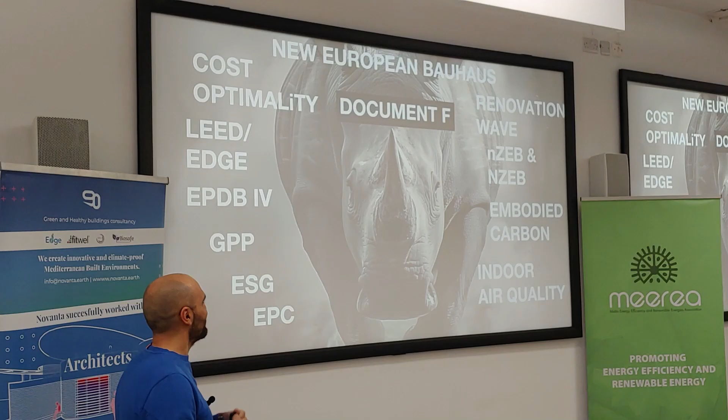So nowadays we have several buzzwords going around the web and even when talking to experts. One is cost optimality, Charles is an expert on it. Renovation wave, the recent published document by the government. LEED/EDGE, all this certification. nZEB with the small letter and the capital letter. EPDB4, embodied carbon, green public procurement, GPP, indoor air quality, ESG. So we have EPC and also, last but not least, the document F.

In reality, what I'm trying to do today is to simplify the process and trying to make it understandable for most of you. I will be a bit technical, but also trying to avoid unnecessary complexity. I don't want to be too simplistic, but I want to, let's say, engage with an elegant simplicity. So it will explain you better what it really needs to be focused on.

So today the topic of the lecture is the opaque envelope, because document F is very complex and has different chapters in which there are specific requirements. Today I want to give you an overview only on the opaque envelope and also connect with the ancillary concepts that can be included in a design that wants to exceed the expectation of a code-compliant building.

So just briefly about me, I've been working in Malta for more than 6 years, covering different fields from being a specialist in environmental design to a perito architect, and then as a research officer with Professor Buhagiar.

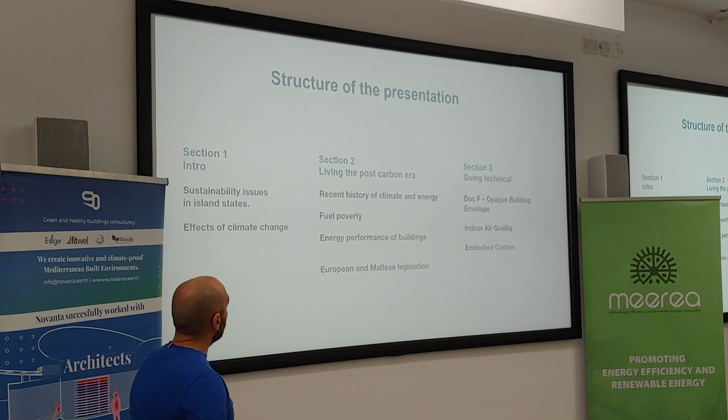Now, the structure of the presentation wants to be, so have a little introduction to give you an overview of what's happening behind the scene and also what is the concept, the context we are operating nowadays, and then we go a bit technical. So let's start with the context of sustainability in island states.

Essentially, it's known that to survive and to keep on having our wealth and well-being, maintain our wealth and well-being in islands, we have to make sure that we have enough energy, affordable energy, we manage our waste correctly, and we have enough clean water.

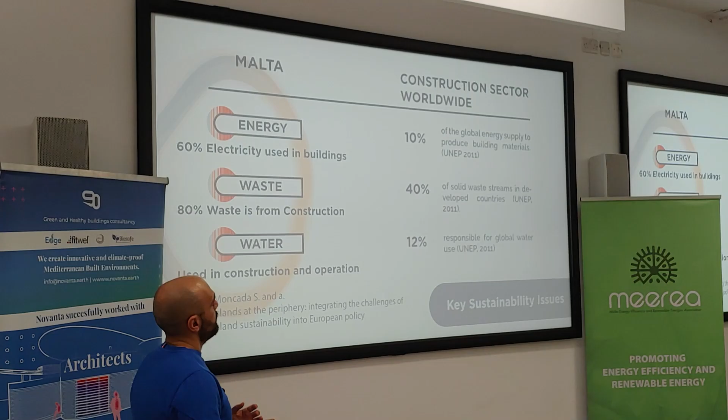But at the same time, energy, waste, and water are topics that are concerning construction, and this is worldwide. And so we can see that in the construction sector worldwide, according to research in 2011, 10% of the global energy supply was used to produce building materials. 40% of solid waste stream is associated with construction activities, and the use of water is most of 10%, 12% of use of water, of the global water, is used for construction purposes.

So managing those three factors that are, in a nutshell, the pillars of what we call green building, it's already a sustainability issue in an island, and also interconnected with the construction industry.

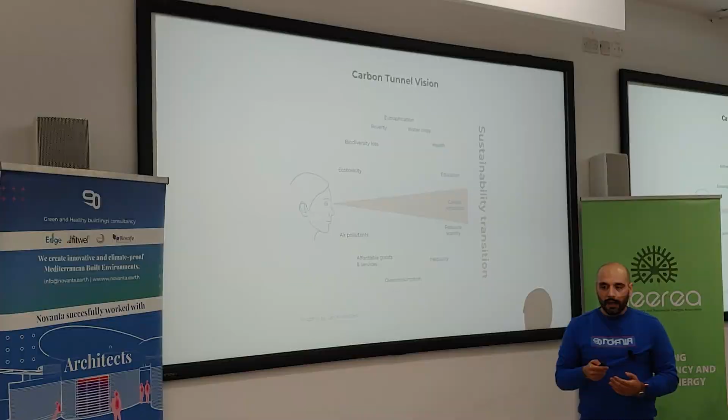At the same time, most of us are always overwhelmed by the topic of carbon storage, carbon capture, carbon footprint. But there is a problem regarding sustainability if we leave the discussion only open to the topic of carbon emission. It's called the carbon tunnel vision. Sustainability, it's much wider as a concept, and then we have more aspects to cover. And if we keep on focusing only on emissions, it's just one part of the story.

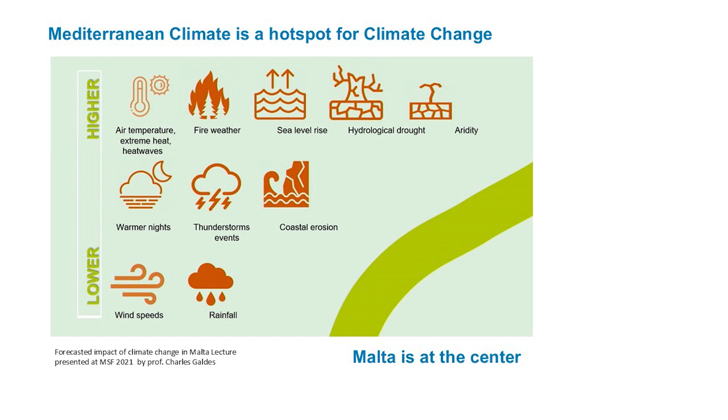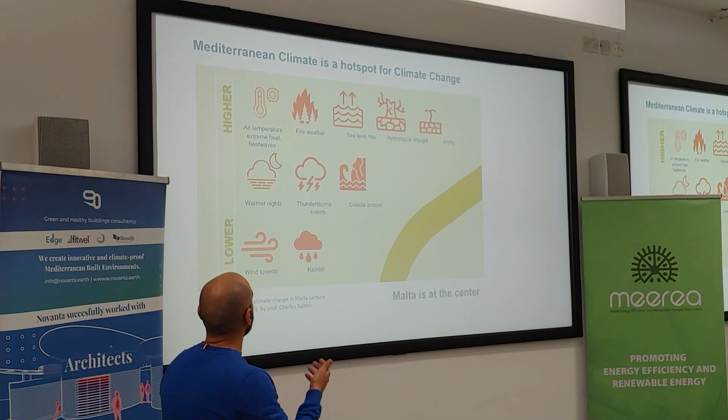We know, thanks to the evidence provided by Professor Charles Galdies, that Malta is facing the worst effects of climate change because it's at the center of the Mediterranean Sea. And the Mediterranean Sea is a hotspot for climate change. What we are experiencing now, and the projection up to 2050, is that those events, meteorological events, can worsen.

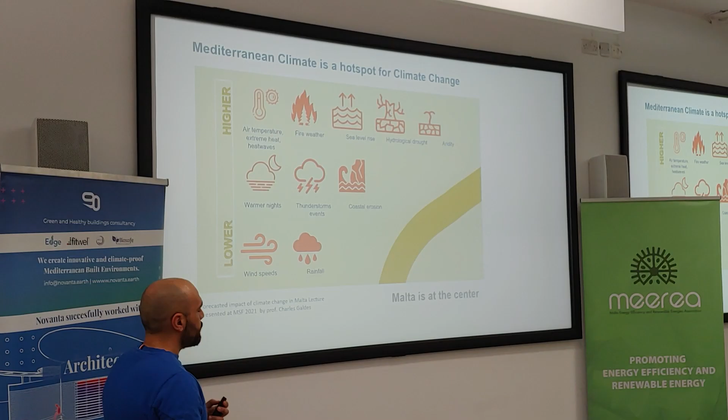So we have increased air temperature, fire weather, sea level rise. So there is a collection of potential events that are hitting the Mediterranean, and Malta is at the center. And what is surprising is also that there are higher probability of increasing air temperature, but at the same time, there is lowering also of wind speed and rainfall. So it's a problem of having in an island, knowing if we have low rainfall, where are we getting the water, potable water, etc. So there are a lot of problems interconnected that climate change is kickstarting.

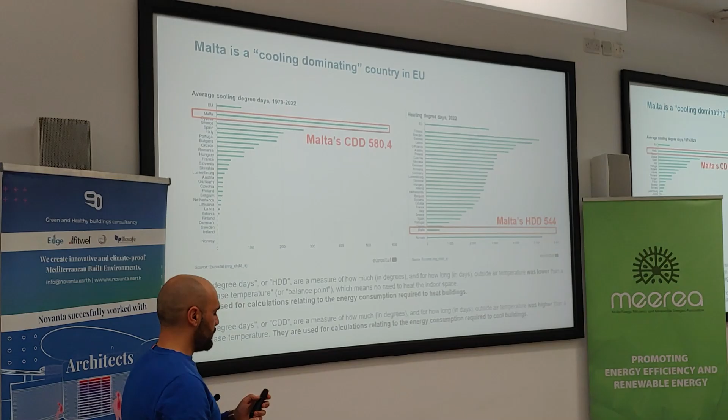Malta is a cooling dominating country, which means we can no longer focus only on concepts like U-value, simply because yes, we have to cater for winter behavior of the building through the legislation and document F. But in reality, we should also consider dynamic effects that are more pertinent to a cooling dominating country.

As we can see, Malta is the hottest country in Europe, having the highest number of cooling degree days, and specularly as opposed to the heating degree days. So the demand of heating load is definitely lower.

Now we are living in the post-carbon era. And what does it mean? I was born in the 90s, and after doing this job for several years, I realized that the topic of sustainability in building construction is well established, more than 30 years.

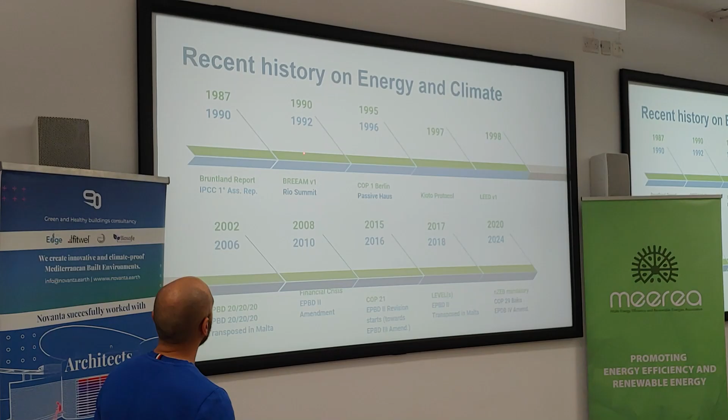In 1990, we have the first IPCC assessment, but then also the first edition of the BREEAM green rating scheme. Then we moved later, in 1996 we have passive house, and in 1998, thanks to the knowledge developed in England, the development of the first edition of LEED.

So thanks to the accumulation of this knowledge, it comes without surprise that the European Union decided to take the lead on those topics, at least on energy performance, and launched the first EPBD, the 20/20/20 package.

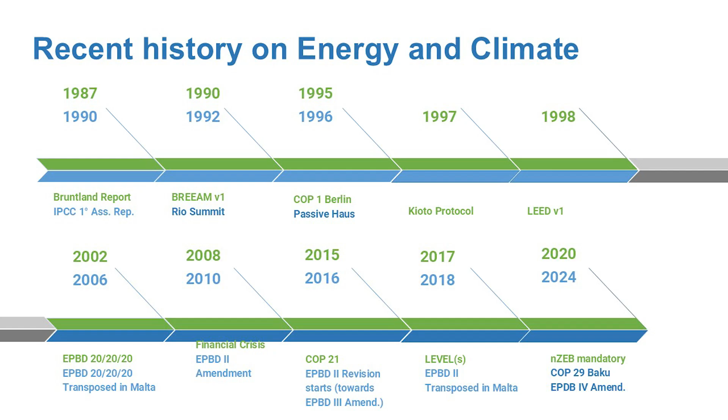Then it's been a landslide because we have the second amendment in 2010, the famous COP21, which established the legally binding agreement, and now the United States has decided to withdraw according to the new government and new presidency.

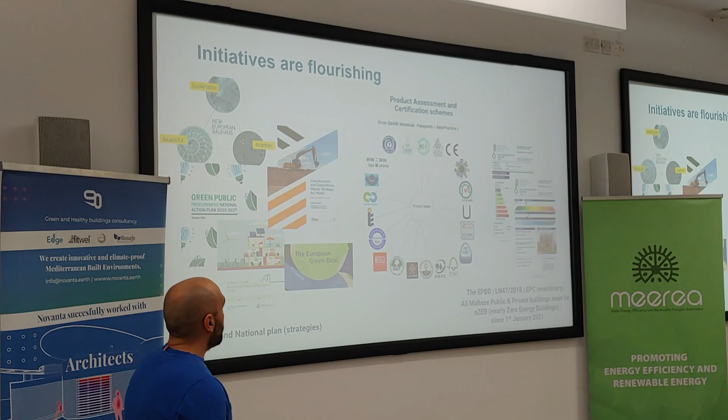But we are continuing working on this, and you cannot really stop this wave of sustainability because we have several commitments in Europe to respect. And one of them is the fourth amendment of the Energy Performance of Building Directive.

That's why initiatives are flourishing. And it's not only European and national plans, but also commercial entities that are trying to cover the loopholes of the sustainability world by issuing new product labels to engage with the topic of transparency. The more transparent we are, the better it is for the market.

And also we have legal requirements such as the famous EPC. But we must always remember ourselves, why are we doing this?

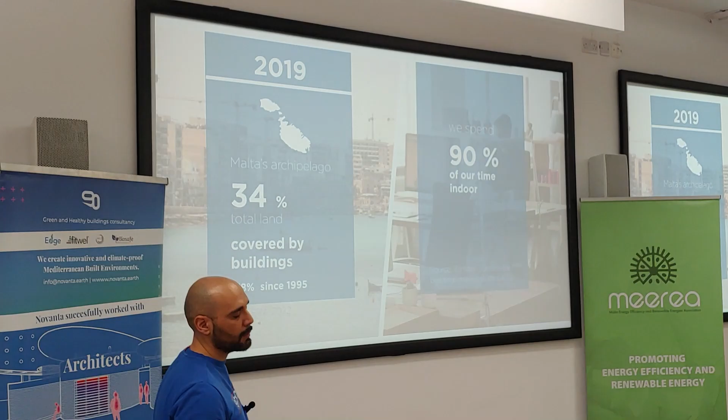Locally, this can be boiled down to two main topics: the fact that 1/3 of the area of those islands of the archipelago of Malta are covered by buildings, and also because we spend most of our time indoors. These are two topics that give much food for thought to continue working on, because buildings are very important for us.

It's also important to remind that thanks to the involvement of the European Union and those directives, we have made an advance towards focusing also on existing buildings. It's not only about designing better newly built buildings, but there is a mandate to focus most on existing buildings, because if we take the life cycle thinking approach, we can imagine there are far less emissions associated with the whole construction process and use phase when you just retrofit a building or adapt it to new use.

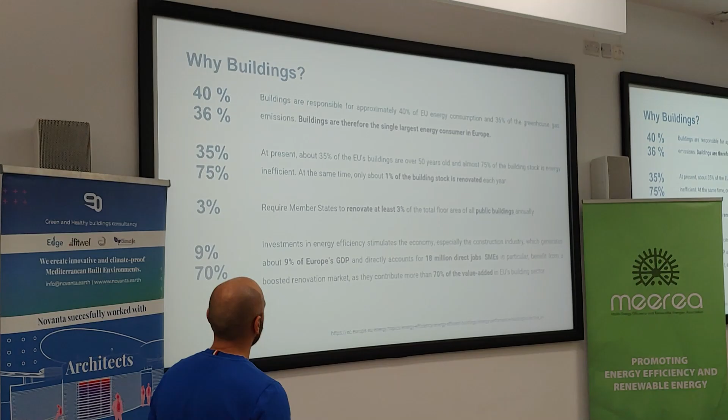This has liberated several new opportunities for creating new jobs, and also to have public buildings leading by example.

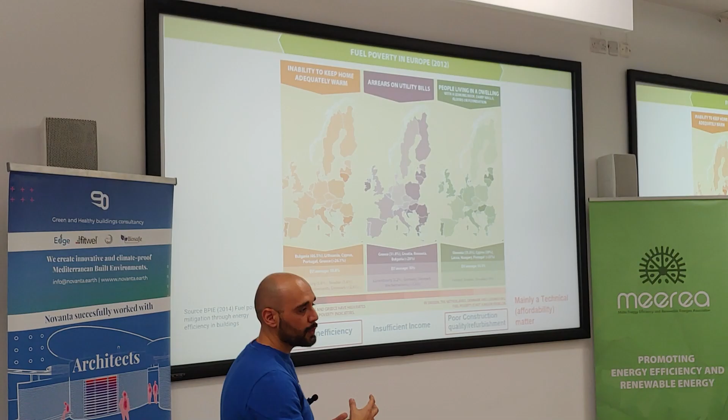If someone of you remembers the little video I launched on social media when promoting this event, I used a particular reference regarding the fact that more than 30% of the buildings in Malta are not built, designed, and constructed to prioritize health and well-being. We can associate this to this graph and this figure in particular.

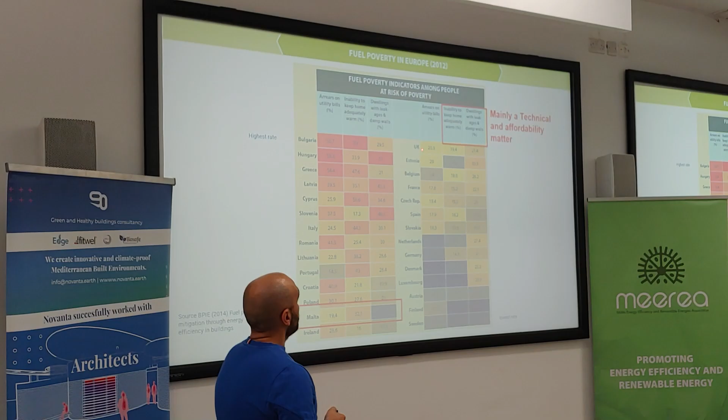What I would like to emphasize is this topic of energy poverty, or in other words, based on three factors: arrears on utility bills, inability to keep home adequately warm, and dwellings with leakages and damp walls. If we look at those three pillars, we are basically dealing with a technical and affordability topic.

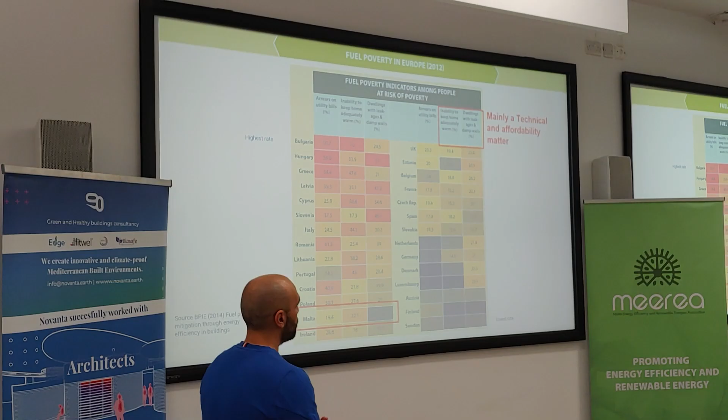It's not something that requires rocket science, something we are not able to do. So it's important to remind even our government that if we push more on these topics, it's definitely feasible with today's knowledge.

There is another evidence from the long-term renovation strategy, again substantiating the fact that it's a technical and affordability matter. From the data of EPC in Malta, it was discovered that the average U-value of the walls is 1.88, and nowadays we have a restriction on U-value at 1.22. Again, these are average figures derived from the various types of assessed building typologies.

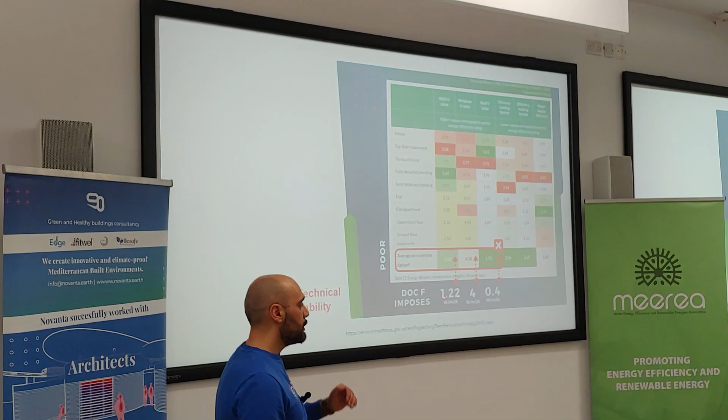Windows are unfortunately still quite high, even though not so far from the limits of document F. And what surprised me is the inefficiency also of the roof, notwithstanding a very low threshold for U-value even in the previous version of document F.

Okay, I will briefly go through the topic of energy performance of buildings and how it is essentially organized on a technical level. I don't want to overdo it, most of you already know this, but it's good to remind ourselves.

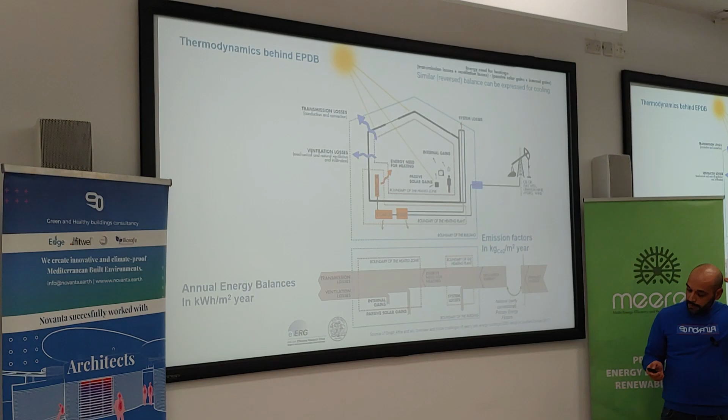So we have an open thermodynamic system, and we have different boundaries pertaining, one to the building envelope, another to the heating plant or system in general, and then we have to provide energy. So this is the direction. We have the very first source of energy, the primary energy that comes from the power plant. Then this is distributed through the grid, and we have a first inefficiency when we pass from the creation of the energy at the power plant through the grid. So we have the loss.

And that's why we associate emission factors. Then this amount of delivered energy gets served throughout those boundaries. And essentially, throughout the process, the flow chart, we see that we end up having several losses. And in the case of heating loads, there is this relation that is similar also to the cooling side of the story: transmission losses plus ventilation losses minus passive solar gain plus internal gains.

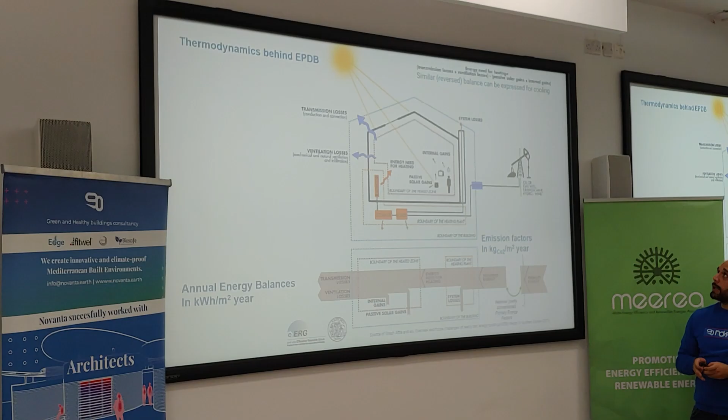In summer, the problem of internal gains becomes a load, so we need to remove it, and we switch the two factors of the equation.

So we can also assign a direction of efficiency towards low carbon buildings. And we can see that if we improve the performance of the boundary of the heated zone, that is the first action you can take to improve your energy efficiency. So the thickness of this arrow must be reduced, okay?

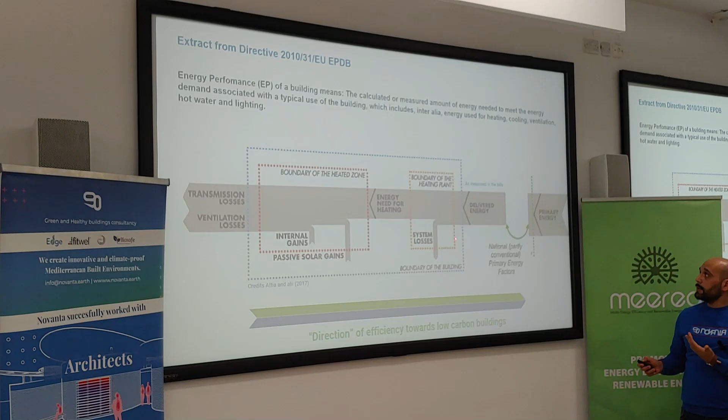And it can also be helped by the internal gains. As a cascade effect, you will then need less delivered energy to keep the same equivalent level of indoor comfort. And then also the energy demand and the energy needs will definitely be lower. So we will be having less carbon emissions, in a nutshell.

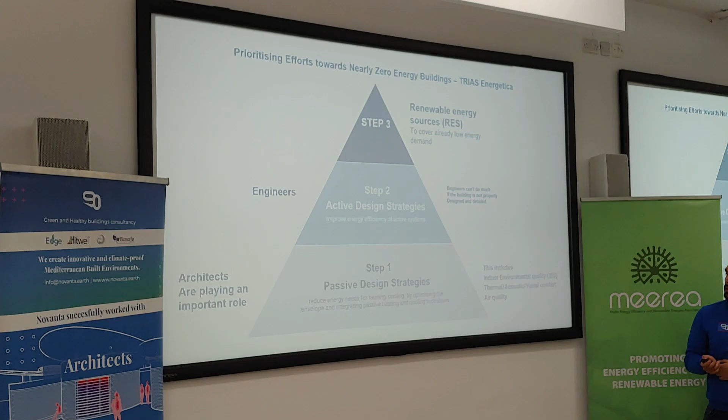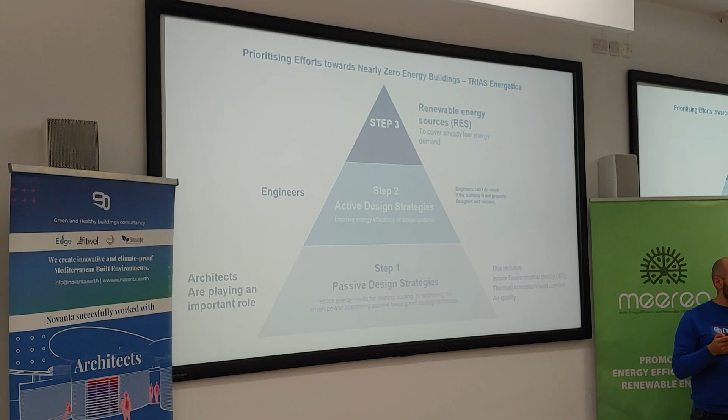So engineers will help us in providing and sizing only what is needed to provide the level of comfort. And then we won't need big, for example, photovoltaic fields to have a net zero building in Malta. We will just cover the net demand that is necessary to cover.

Passive and active systems - what is passive? Passive strategies work on building materials specification, so thermal conductivity, specific capacity, etc., dimension and orientation, window to wall ratio, shading devices, insulation, and glazed area, of course.

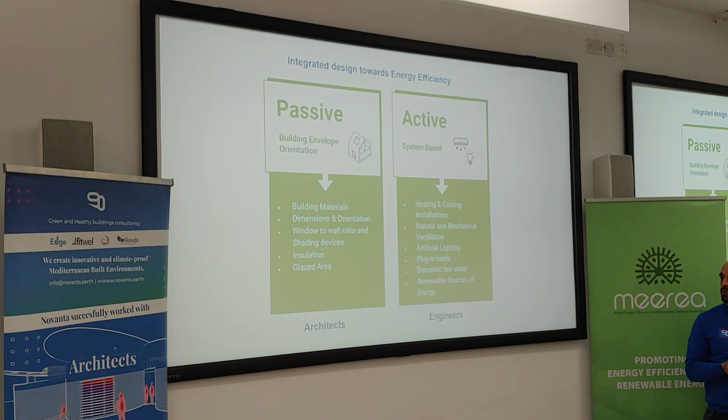And then active, system-based: heating and cooling, plug-in loads, renewable energy sources. So these are the two main disciplines in architecture and construction that are getting together to support energy efficiency and sustainability in general.

I will briefly remind you of the legal requirements, because as I was saying, in 2002 we had the first EPBD at European level. And now, after 22 years, we have the Fourth Amendment. So we are encouraged by the European Union to continue working on this. Also, the Second Amendment introduced the concept of nearly zero energy building, NZEB. And the Third Amendment was raising attention on major renovation.

These are the topics that the directive, the Third Amendment, was insisting upon: essentially the smart readiness, the cost optimality, and the existing building, and also knowing what is a major renovation, what are the conditions to define it, and also imposing stricter requirements.

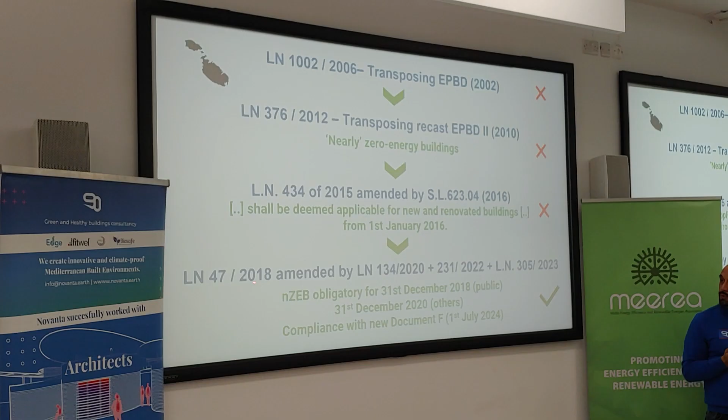In Malta, Malta joined the European Union in 2004, so it was still lagging behind at the time. Now it's trying to get back on track. So we see that in 2018 there was a rush to implement the EPBD2. To be honest, I don't know now what are the plans for the Third and Fourth Amendment, but Document F, the new version of Document F, is aligned to the second EPBD.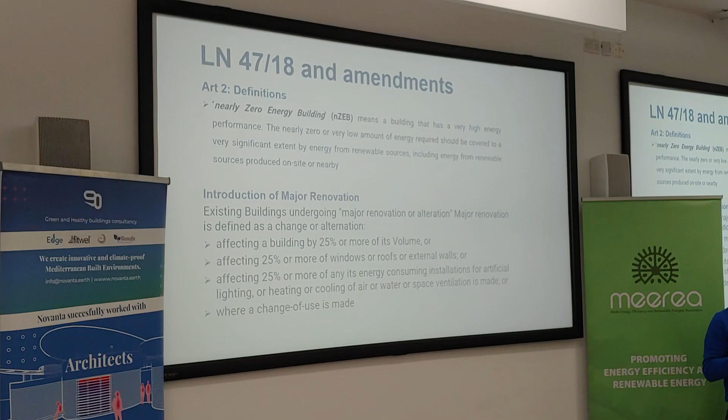The zero energy building is a building with an extremely low amount of energy needed to cover the needs, and the demand of energy should be also provided most of the time by renewable sources that are on site or nearby. Also, major renovation is a very interesting topic, because once we get an existing building, you might have to perform even little intervention.

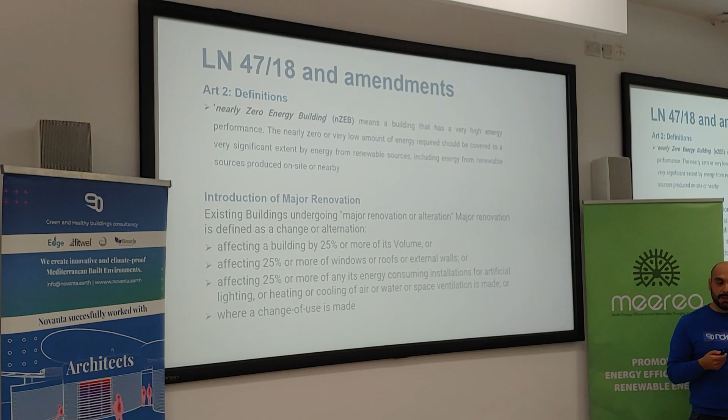Then it doesn't make sense to charge you with requirements that might become very expensive. But when your development is more extensive, maybe you want to have a deep renovation of it, then the limits from the law are 25%, either 25% of the volume of the building that is changing.

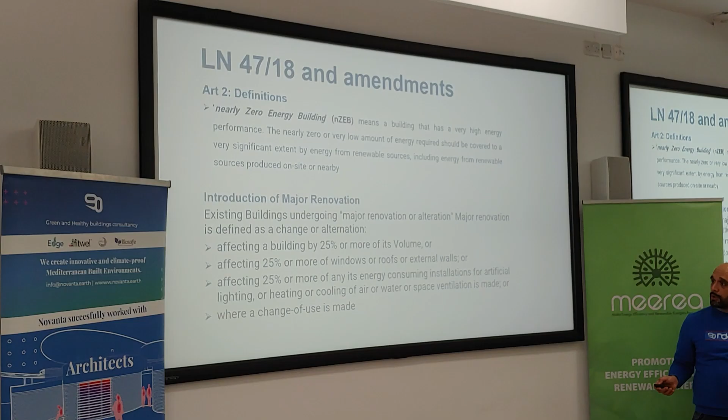The works are affecting 25 or more, 25% or more of windows or roof, so the building envelope. This is another factor to demonstrate major renovation: that you are changing more than 25% of energy consuming installation, or simply a change of use.

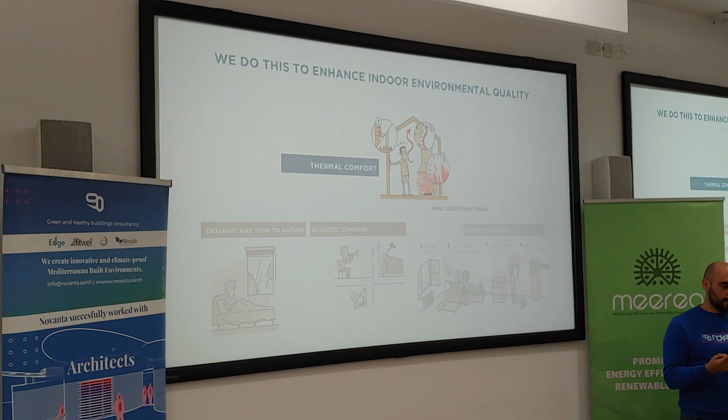And we have this urgency to comply with standards. But in my opinion, sometimes it's always good to remind why we are doing this. We are eventually doing this because we want to enhance our thermal comfort, because heating and cooling is mostly related to thermal comfort. But we can also overlap to the other topic of environmental quality, indoor environmental quality.

So let's go into the detail of the structure of document F. Do you have questions so far? It's fine for you? Shall we continue? Okay.

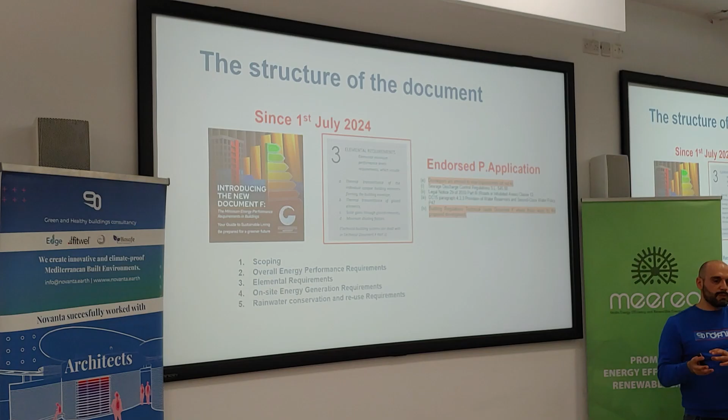Most of the parents in this room will know that once you get a permit endorsed, you will have to abide by the building regulation, and even before, but mostly now from the 1st of July 2024, we have to abide by the technical document, which has a new version. There are 3 documents: one specifically focusing on residential building, another on non-residential building, and the third on technical service. It's a quite interesting structure because you have to address different problems, and it gives you an overview of the system.

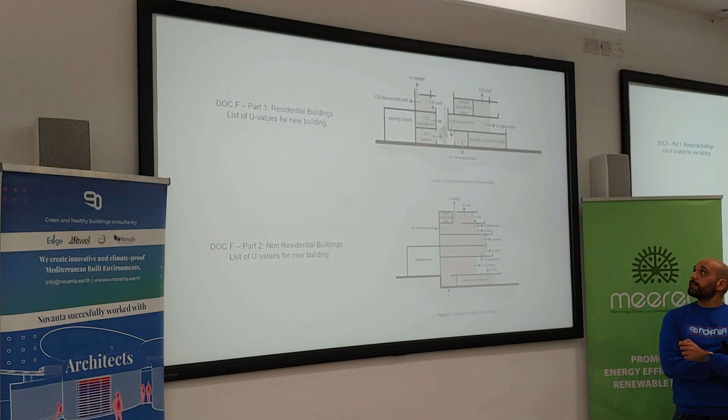It gives you an idea what you can install as an energy-saving technical system. Since today we are talking about the opaque envelope, I want to emphasize in a nutshell what are the requirements for the envelope. We have in residential building, this figure here, we have in this case for major renovation, a limit on U value of 0.59, and similarly for exposed floor we have 1.57.

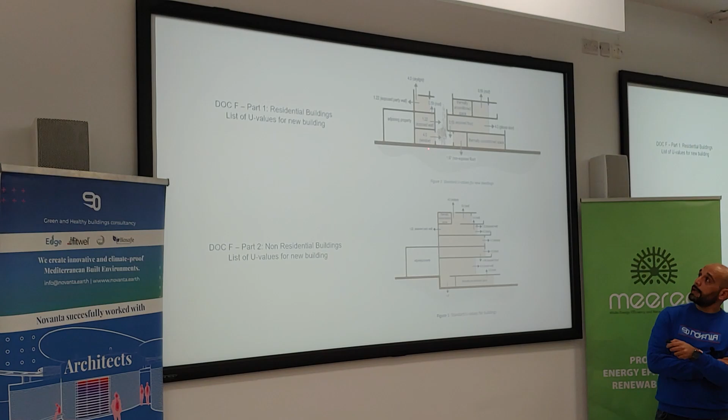So the exposed wall - this is not... sorry, new buildings: 1.57 for major renovation, as opposed to 1.22 for new buildings. And then also you have non-exposed floor.

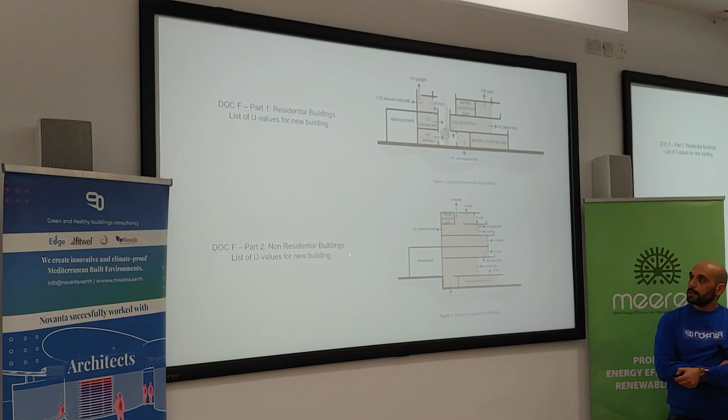Then there is also a requirement on windows, but it's quite easy to demonstrate that you are complying with this. Tell me, observation? There's a mismatch between the roof figures - the upper drawing says 0.59, and then there it says 0.4. The lower one is for non-residential. The government is saying that probably it's much more important to protect the roof, to have... it's a mistake in the drawing.

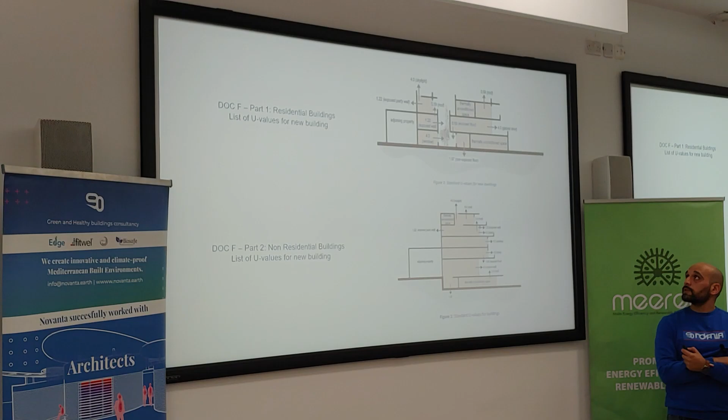But it's legal, so anyway. But they have put a small note - a really small note that says it should be 0.4. But even for residential, you mean? Ah, okay. Anyway, consider that to get to 0.59 or 0.4, you need at least 10 centimeters of insulation. You cannot do it with less.

The topic of U value revolves around mainly 2 material parameters: one is the thickness, and the second is the thermal conductivity. You calculate it from ISO 6946 - you sum all the thermal resistance, all the resistance of each layer of the envelope, and simply you get the final U value. Then you repeat this for all the walls, roofs, exposed floor, non-exposed floor.

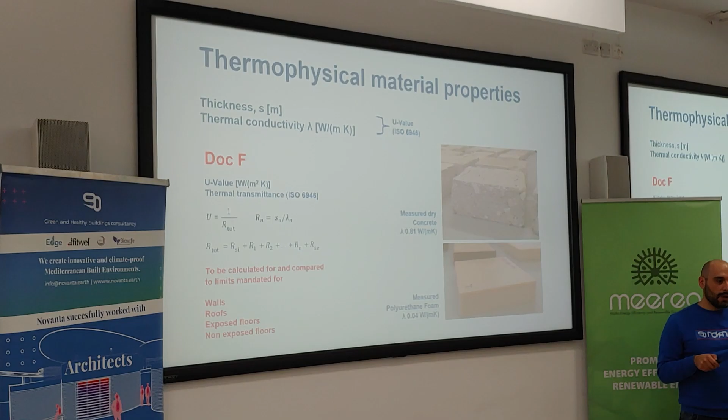To be precise, non-exposed floor has a much more complicated equation because it tends to take into account the interaction between the terrain and the wall, and this is typical for basement or semi-basement. Exposed means exposed to the outdoor environment. Non-exposed is the ground slab, or an unconditioned space like a garage, or stairs. So those spaces that are unheated, where you don't have direct control on the temperature, and also the outdoor environment.

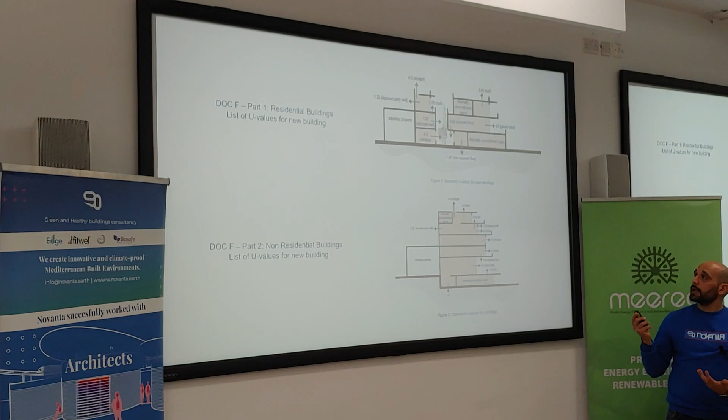So the thermally unconditioned spaces are considered as being outside of the building, like outdoors, in terms of dealing with different stimulus. It's not the same as the outdoor, and essentially it's just a different level of requirement that you have to abide with.

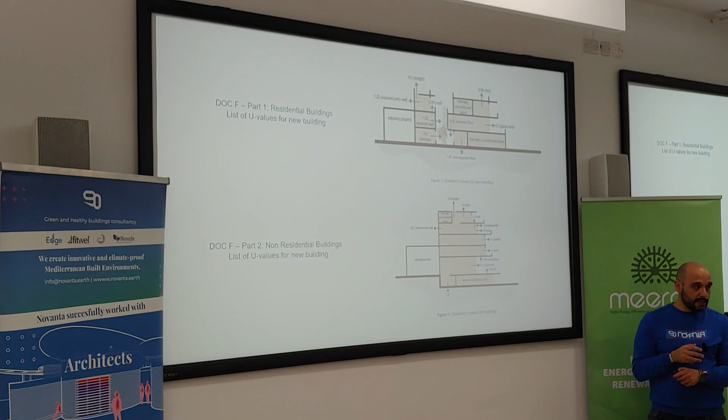Definitely, I think who did this part of the committee was saying maybe the contact with the ground, the outdoor stimulus is not as variable as the outdoor one, because the terrain tends to be seasonally stable at a specific temperature, but then we're not seeing the content of water, and that's another can of worms. In any case, they were saying the variations are mild when in contact with the ground, as opposed to the outdoor environment that is more variable. So you need a stricter requirement for outdoor elements, for elements exposed to the outdoor elements.

Just to give you an idea, a non-insulating material like concrete has 0.8 watt per meter Kelvin thermal conductivity. An insulating material like polyurethane foam has 0.04. So you see the difference in the order of magnitude between the two parameters.

Okay, let's make a step forward. Document F includes a database of material properties that are indicative for you to start your assessment, but they need to be replaced once you decide what material you are really installing in your building.

In that list, it's also included the density and the specific heat capacity. Thanks to these two other material properties, we can tap into ISO 13786, and we can also study the dynamic parameters of building materials.

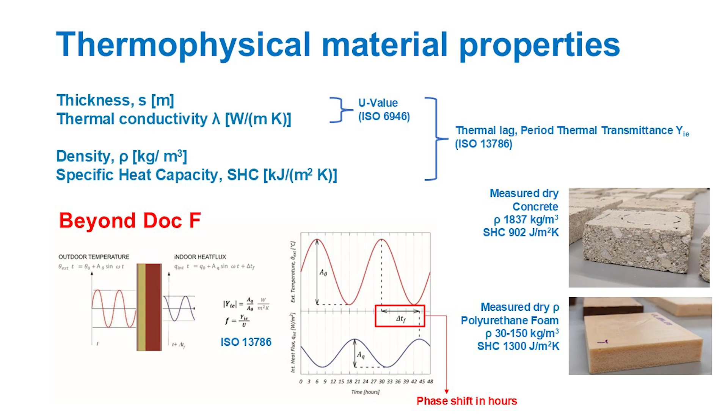So you can even decide, according to how you're going to use the building and the type of building: really, I don't need thermal mass, but I need to heat up and cool down the building faster. I put the insulation indoor, as opposed to the most recommended solution of having the insulation on the outer skin.

Simply, the periodic thermal transmittance is defined by the ratio between the heat flux, the indoor heat flux - this blue curve here - and the outdoor temperature. Those are two sinusoidal relationships, and the phase shift between the peak of the outdoor temperature, the maximum temperature usually experienced at noon or at 2 p.m., needs to be delayed by several hours from the peak of the indoor heat flux released.

And this heat flux then essentially will constitute a load, okay? And the more massive - the higher the thermal mass is - the higher is this time shift between the two sinusoidal curves, okay?

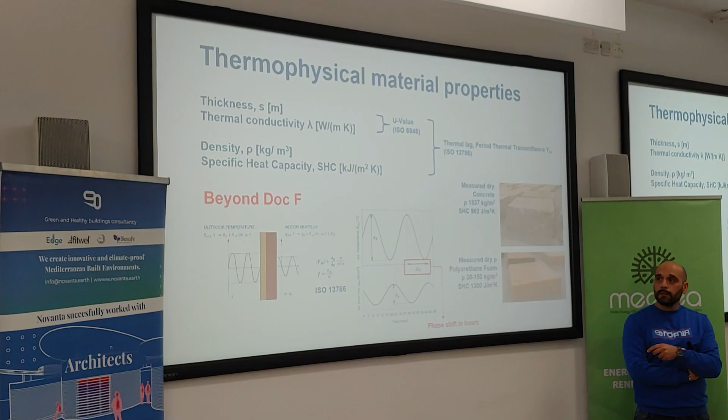And that's it. So it's important to know that this calculation of thermal mass is not just a random number, a very big number like we have in the EPC calculation, the so-called effective thermal mass. There is a much easier metric to calculate, to quantify, at least theoretically, the impact of thermal mass that is expressed in hours. I will show you with examples what it means.

Just to give you an idea in terms of density, keeping on with this comparison between an insulating material and non-insulating material: concrete has a density of 1,837 and a specific heat capacity of 900 joules per meter square Kelvin. As opposed to insulation, which is typically between 30 and circa 100, 150 kilograms per cubic meter, while the specific heat capacity can be quite interesting, up to 1,300.

Now, to show you the importance and the position of the insulation layer, and the way you can really change the behavior of the opaque wall according to your needs, I will keep the U value fixed at 0.56, and vary the other parameters. I will show you how the thermal lag and the internal areal heat capacity will change.

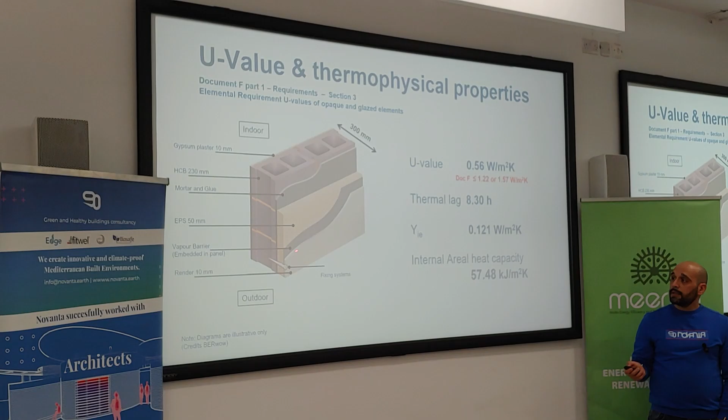So in this case, we have the cappotto, a famous cappotto solution, 300 millimeters. Simply a 230 load-bearing wall with an EPS panel, 50 millimeters, the fixing, and of course, render and plaster indoor.

So, according to ISO 6946 for the U value and ISO 13786 for the dynamic parameters, we have 0.5 for the U value, and then we have a thermal lag of more than 8 hours, a Y value - the periodic thermal transmittance - of 0.12, and an internal areal heat capacity of 57 kilojoules per meter square per Kelvin.

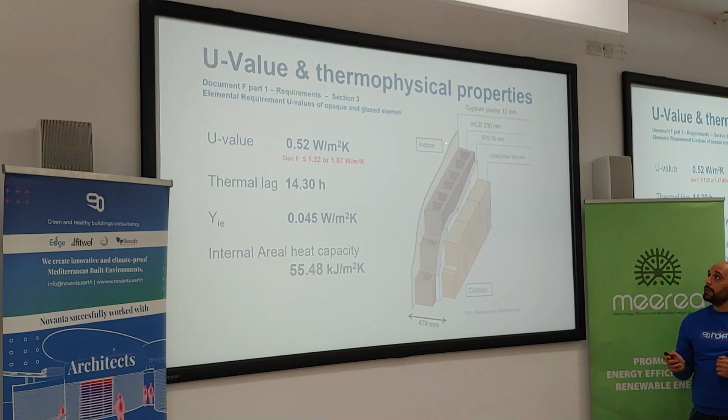If we opt for a double leaf wall, okay, 230 HCB internally, 50 millimeter EPS, and limestone leaf of 180, we have still a U value of 0.5, but the thermal lag is skyrocketing to 14 hours.

And also, this is reflected by the periodic thermal transmittance. But the internal area heat capacity remains the same. Why? Because we are maintaining the same material facing indoor, and because of this property, its density, gives us this kind of value.

Also, it's important to notice the thickness of the wall. To maintain the same level of U value, you are adding 17 centimeters to maintain the same static metric. But here we are privileging the dynamic effect, so we are gaining more than 6 hours of thermal lag.

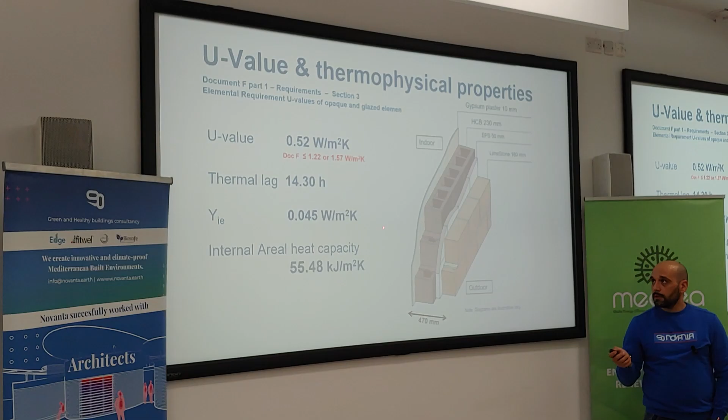The thermal lag, in a nutshell, is the theoretical amount of hours through which you can expect to perceive the outdoor temperature indoor. So this perception is delayed by this amount of hours. Again, theoretically, because the models might be imperfect, but they are quite good, and I have demonstrated it in another paper I'm currently writing.

And again, these are walls with another purpose. So theoretically, you're saying it's 14 hours in this case for the thermal lag to start feeling the effect. Will residents start feeling the perception of a warmer indoor temperature, especially in summer? And cooling off will take even longer?

Yes, it will take longer. Thanks for the question. The thing is, they will feel that temperature, for example 40 degrees, only if 40 degrees are maintained over the day. But most of the time we have temperature swings, so the wall won't have that external stimulus to maintain and transmit that heat proportionally, and then eventually we will be feeling 40 degrees after 14 hours.

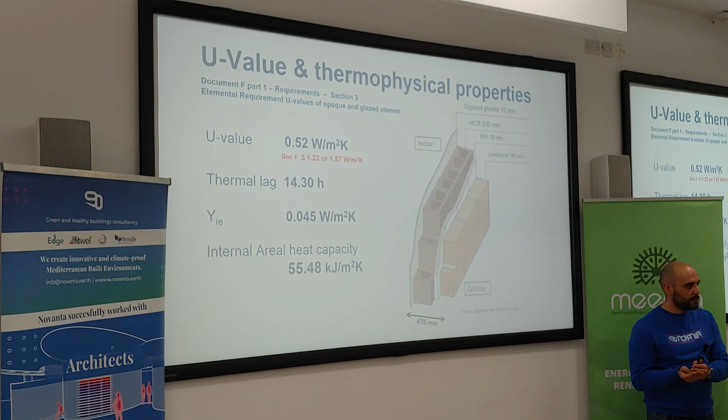But the concept behind the thermal lag, and thermal mass in general, is this: the advantage is that having those temperature swings, definitely we will not reach, surely we will protect ourselves from this kind of events.

Perhaps the thermal lag of 14 hours could be interpreted in a real building, like a terraced house where you have a bedroom upstairs, or top floor. If the sun is strongest at 2 o'clock in the afternoon in July, the hottest day, then 14 hours later you are asleep in that room, like 4 o'clock in the morning. Just consider heat lag - would you actually feel the heat?

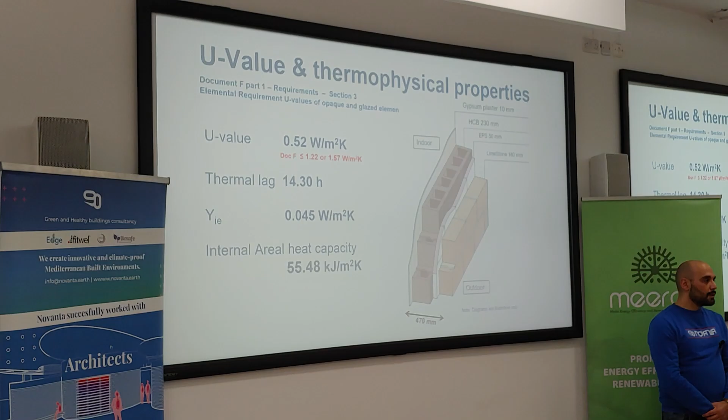Yes, exactly, for a bedroom, but maybe for a living room, or classrooms in a school, it's a different story. So I think it needs to be tweaked for the building type. Exactly, that's the power of having this kind of assessment right from the start when you design your building - you can start this conversation with the designer and understand what needs to be done according to the use of the building.

For example, if we consider the winter season instead, the thermal mass will help you in maintaining the comfort, the heat, for longer. So it works positively in both seasons.

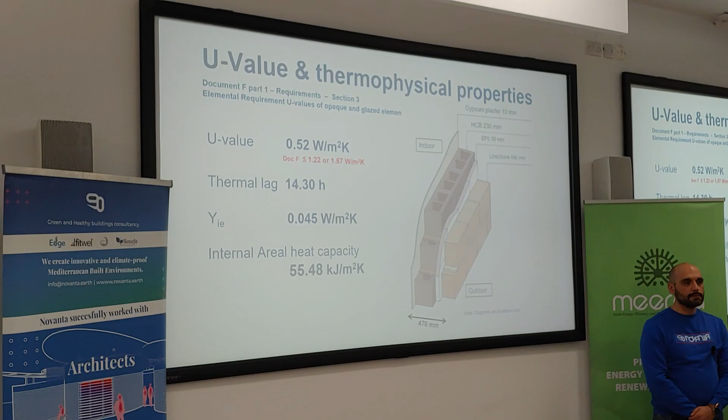And when you say thermal lag, is that considering a constant outdoor temperature for it to calculate? Yes, you are considering the temperatures outside - essentially the curve, the relationship, is always the same.

Then the software that does this for you considers the profile throughout the day. But eventually, thanks to the properties, if outside the temperature is below the indoor temperature, then you would have a reverse direction. Yes, and definitely, but it's not the direction of the heat that matters - what also matters is how the wall reacts to those external stimuli.

And so this is a theoretical calculation to give you - listen, if you want to opt - it's important to focus on overheating. Yes, and again I'm insisting on this because this is beyond Document F, of course.

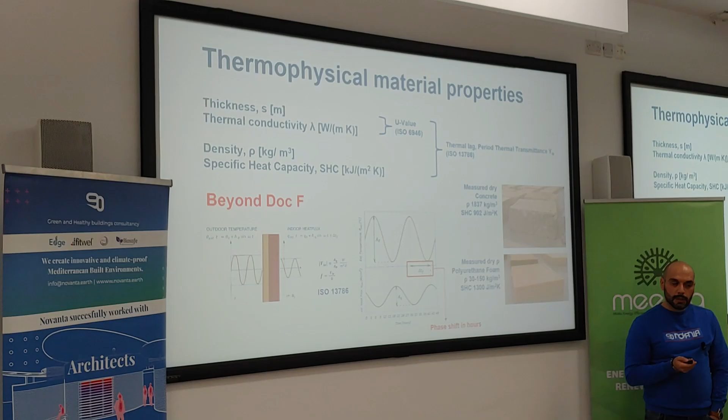Nobody's asking you to calculate, but it's good to remind that there are opportunities to reflect on the material properties that are already included as a reference element in Document F. And if you can perform this kind of assessment, it's very useful if you think about it dynamically.

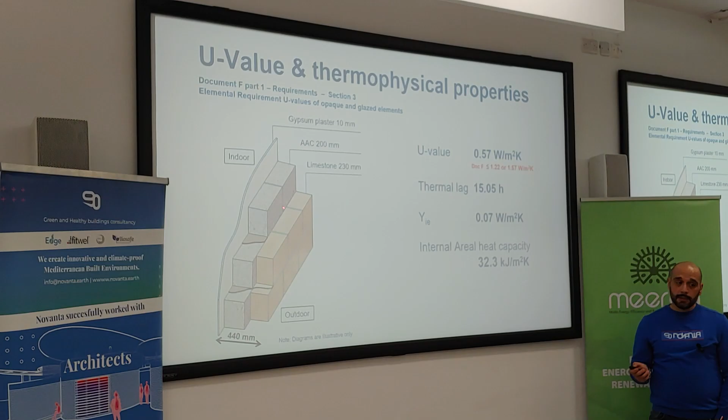So again, you can appreciate similarities in terms of U-value. Steady state metrics that are identical, different solution of wall, but definitely different behavior in terms of dynamic.

Aspect of the building. In many cases, the hollow core blocks are specified as filled with concrete, so they're no longer hollow. And in many buildings, they are specified as double leaf filled hollow core blocks with insulation on the outside.

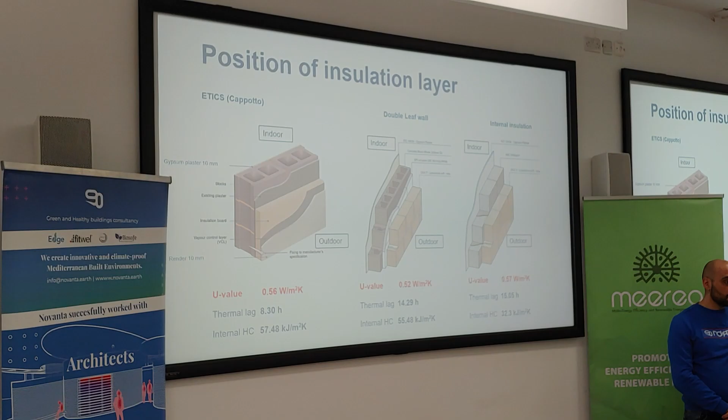So would you expect the thermal lag to be greater in that case? Sure, if you do double leaf hollow core plus insulation, you might be closer to this solution, because you have quite a decent density thanks to the hollow core block, plus the 50 millimeter insulation that contributes to the thermal properties with low conductivity. I cannot tell you exactly the U-value, but it might be probably in the region of 0.7, 0.8. That's to be calculated.

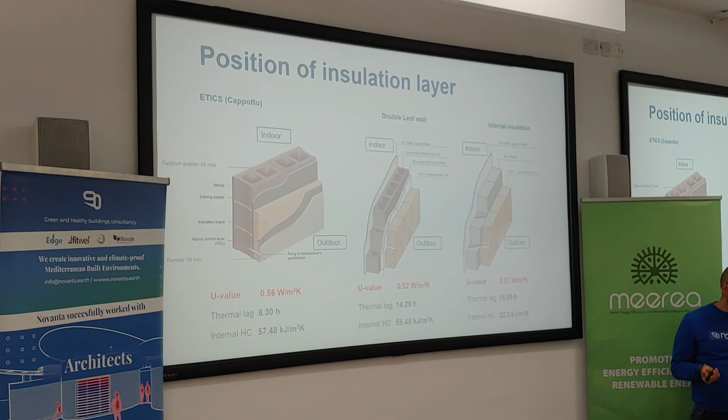But dynamically it could be interesting. Again, but this is just part of the story. Then there are a lot of other questions when we decide not to insulate an element, that has to be considered as well.

Again, insisting on insulation, it's important to remind ourselves that if we build a single leaf wall, the theoretical calculation gives you 1.9, 1.8 for an HCB, but we measured with Professor Buhagiar, and a single leaf HCB is 2.4 in reality. And Charles Yousif has a similar paper that reached the same values.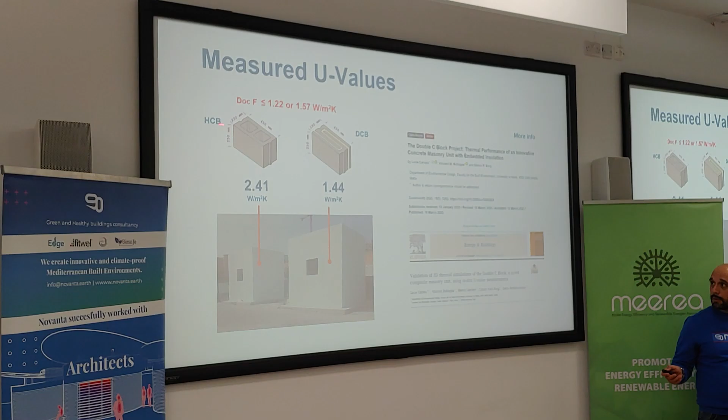Depends a lot on the manufacturing. Also the manufacturing, but yes, as much as the compressive strength. But I'm not expecting that it goes lower than 2.

So this is an uncompliant wall. That's a fact. It doesn't make sense to continue building in this way for several reasons. And I'm using this as part of an example from my PhD thesis on the double C block.

This is an insulated block. At the center part, it's a 190 block, insulated, and we have 3 centimeters of polyurethane insulation. And this small amount of insulation led us to measure a 1.44 U-value.

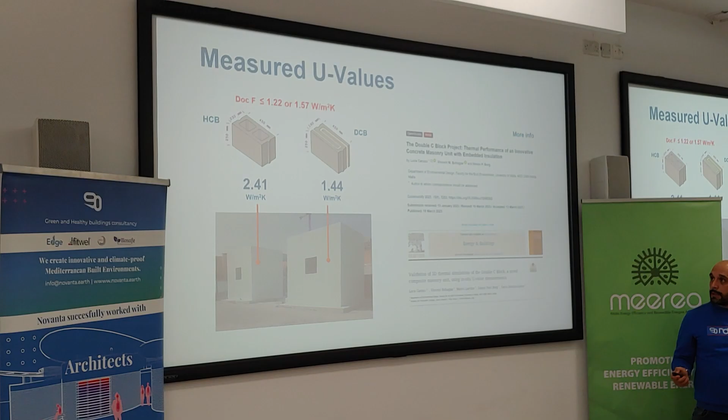So here you have two references if you want to know more about this research. And this research was conducted before the new enforcing of the new Document F. So we were still compliant.

But now the solution is to simply increase the quantity of insulation in the double C block. My theoretical calculation with a 230 double C block and 2 centimeter insulation all around is in the region of 0.6, because the central part is almost 6 centimeters of insulation, so it's equivalent to the cappotto.

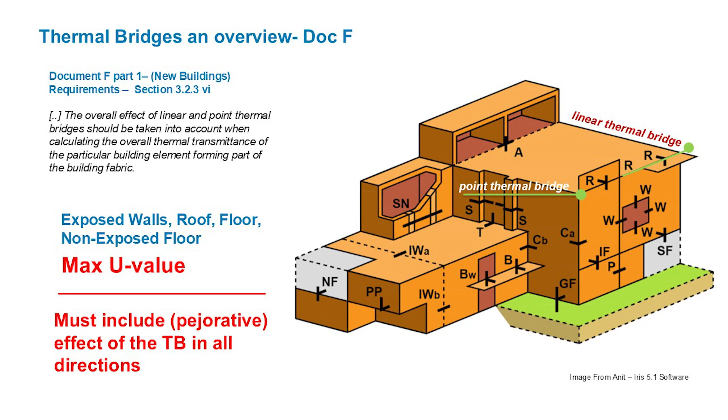So far, the issue about not caring about thermal bridges is the hygienic aspect, because being a preferential heat transfer path might be the ideal environment for the development of mold. So we could have colder spots in the building envelope, especially in winter, and with a high level of humidity indoors and outdoors, this might kickstart the condensation phenomenon.

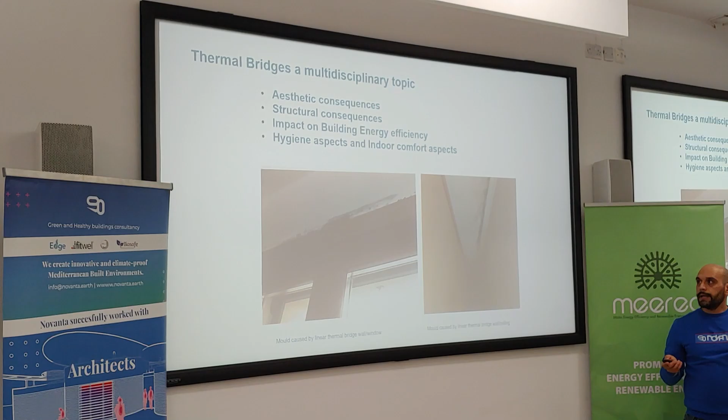And this can lead to black stains, because of particulate matter in the air, but mostly the development of surface mold. So especially if the building is heated intermittently, these are things that might happen in Malta in some part of the year. And once the mold starts, it becomes difficult to remove it, so there will be a price to pay.

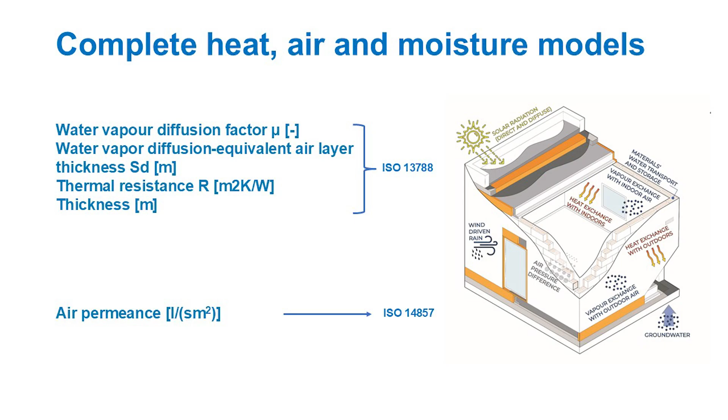It's important also to remind that Document F, energy efficiency, the debate is only about thermal performance. It's not about hygrothermal performance. And in my opinion, in Malta, hygrothermal performance, which means considering the impact of vapor dispersed in the air, relative humidity, and in conjunction with the thermal phenomena, is definitely something that needs to be addressed.

Heat, air and moisture models, this is the whole inclusive assessment that one has to try to consider, at least to make sure you have all your parameters right.

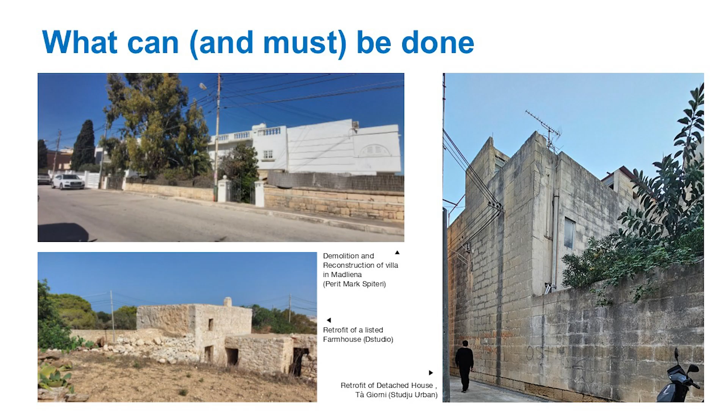The objective - I must say that it's possible to implement what I already said in real projects, and I'm happy to share that I'm working on several ones that are trying to implement these deep assessments, even when you have a very strict requirement like this farmhouse in the north of Malta.

Now let's close the topic of Document F, and let's start something that might be new for some of you. This is called the indoor air quality topic.

Being a very small and confined volume, and we spend most of the time indoor, the truth is that the most polluted environment is the indoor one. So we must shape our habitat in a way that preserves our health. The effects of bad air quality indoors are associated with pathologies such as asthma, ictus, and rhinitis. It's really something that can trigger problems when you spend so much time not only in your buildings, but also in offices that are disregarding these aspects.

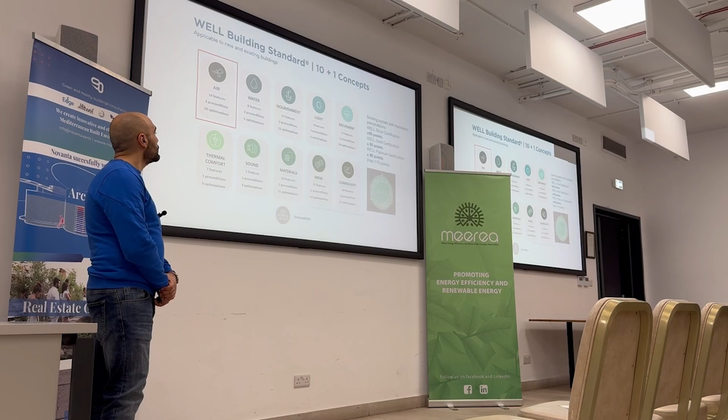There are references we can use when starting to understand what it's all about. One is a certification, the most famous certification for indoor environmental quality, and it has a concept specific on air. It's important to consider what it tells you to monitor the level of pollutants.

The most important pollutants for indoor air quality are particulate matter, PM2.5, PM10, inorganic gases, carbon monoxide, ozone, and when we deal with basements, we have radon. In Malta, I knew that there are less effects of radon apparently. There was a study saying that it's not really a problem. But you can also push for enhanced air quality and lower those thresholds.

It's important to point out that those thresholds are monitored when the building is occupied. So to get the certification, you have to monitor the building. That's why it's called performance-based, a more performative approach rather than simply assessing sustainability. Once you have monitored for a year, then you must take action if your building is not designed right to maintain the certification.

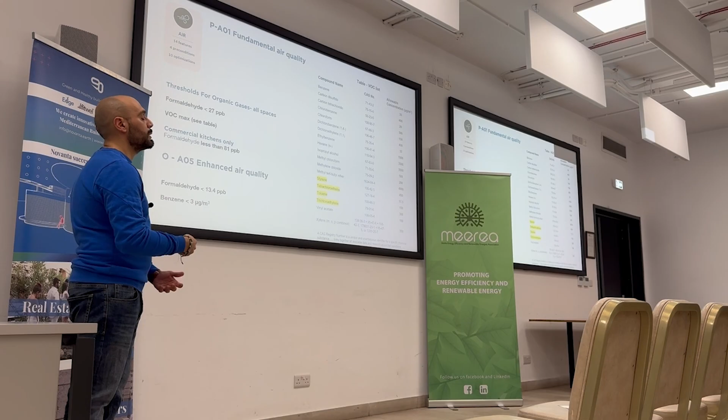So you can imagine, when you design a building without monitoring, what you might breathe every day. As a designer, we are now aware of the impact of our choices when installing building materials or whatever we want to furnish our buildings with. And it's a very important decision to communicate to the client.

But something that works against designers is the lack of transparency in the use of building materials. Thanks to the evolution of the market and the interest supported by requirements of construction authorities, some manufacturers are becoming aware and are working to be more transparent. The main two aspects being studied are the health product declaration, a certificate that tells you the impact on ecotoxicity and human toxicity, but also the overall environmental impact through the EPD, which is connected to the concept of life cycle assessment.

I would like to connect this with the local green public procurement standard. The most important tender currently out for bidding is the new acute mental health department at Mater Dei Hospital. As part of the tender, the contracting authority has imposed the green public procurement strategy.

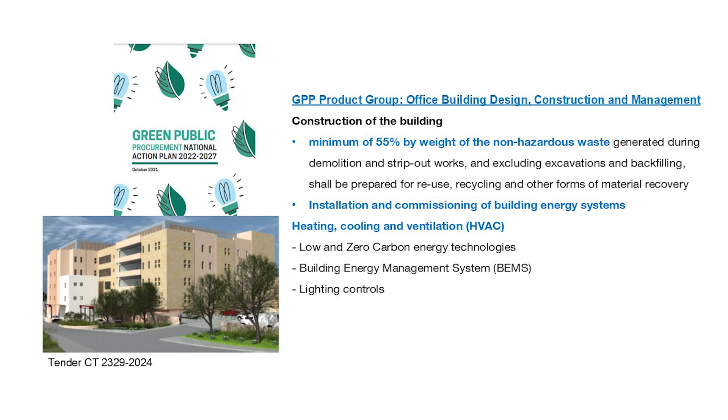If we connect it to the opaque envelope, what we have is 15% of recycled content required for structural frame, beams, external walls, etc., even the foundation and substructure. So as you can see, there is this connection in terms of resource efficiency. But also, when you demolish the building, 55% by weight of non-hazardous waste must be diverted for recycling or reuse.

Surprisingly, there are also limits only for paint and varnishes about volatile organic compounds. But this requirement doesn't go into the detail of the single element dispersed in the formulation - it just tells you the use of the paint and varnish, and you must meet those limits. Is it BREEAM or LEED? No, green public procurement. The standard on sustainability metrics is only the EPC - they require an EPC at the end of the day, because BREEAM and LEED goes very into detail of different phases, so it's not really partial like the national legislation.

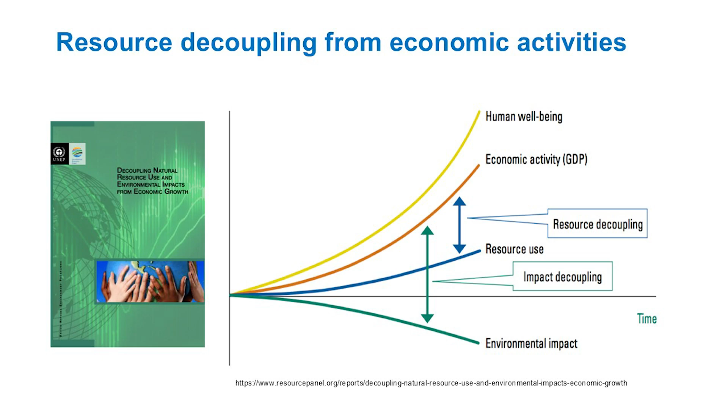Okay, embodied carbon, I will be fast on this. The idea is that the growth of well-being and the related economic activity should be disconnected from resource use. The more we do with less, the better, and symmetrically, even the environmental impact is reduced.

If we approach life cycle thinking, the application in construction is quite interesting because construction of buildings has several layers of difficulty. You can have one level of assessment at material level, stopping at material extraction and production - these are the modular elements to describe a life cycle assessment. If you opt for assemblies, you stay here but can add transport.

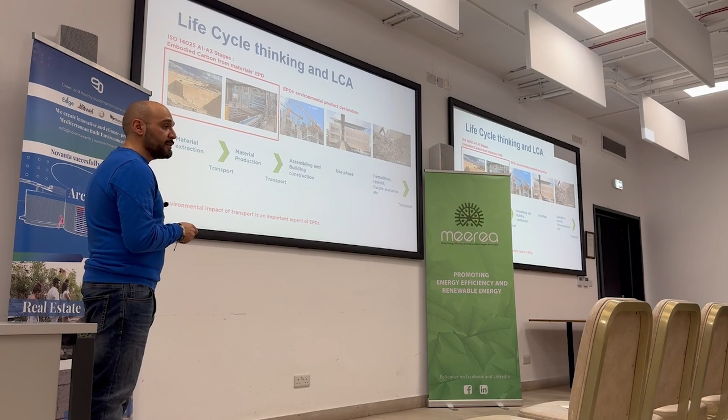If you want to consider the whole life cycle assessment of the entire building, you have to move to consider other categories: use phase, demolition, etc. It's important to point out that transport is very relevant because the same building, same specification, will have a different impact whether it's built in Norway or in Malta.

For this reason, I want to introduce the material pyramid. It's an exercise developed by some professionals in northern Europe, based on EPDs valid for Northern Europe and Scandinavia. It's an interactive database of building materials, and through the information gathered from those EPDs you can see how the various impact categories change the importance of environmental impact of materials.

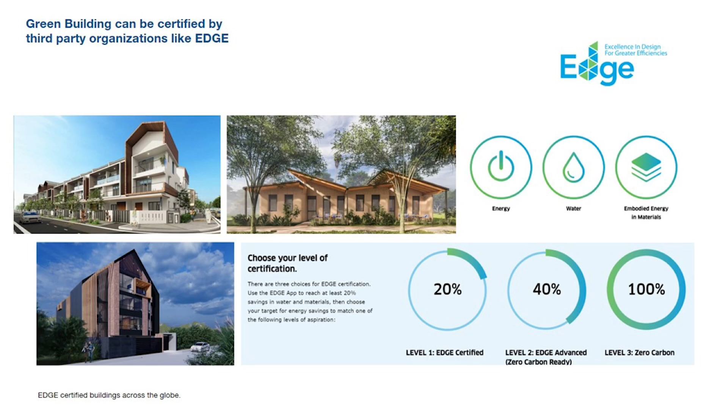For this reason, to reconnect to the previous presentation, EDGE is establishing a worldwide database of GWP values, so you can assess your building according to energy, water, and embodied energy. To get the certification, you have to be 20-20-20: 20% efficient in terms of energy, water, and use of material.

In conclusion, the method I'm envisaging to push for what I already discussed is to work on the code compliant elements, the pillars, which are energy and water - it's part of document F. Essentially what I propose is to start working first on the building envelope, on the assemblies, to leave enough freedom to do a scenario analysis, so you can really build your bill of quantities and get an idea how much this energy efficiency exercise will cost you.

After that, you can combine the results of the energy efficiency assessment on the building elements, and then start having building simulation. A simple building simulation is even the EPC assessment at the design stage, but you can also implement more advanced ones, like climate-based dynamic building simulation in terms of energy performance and daylight assessment.